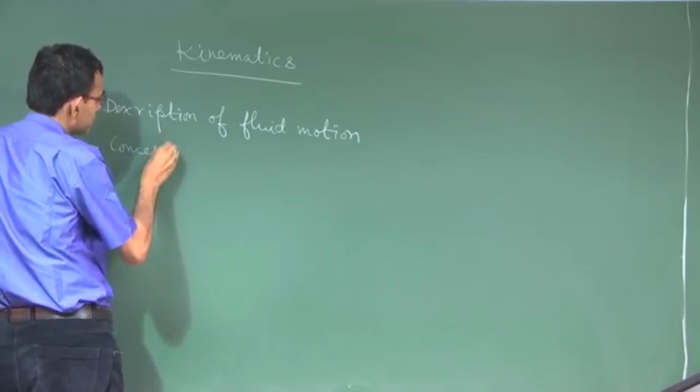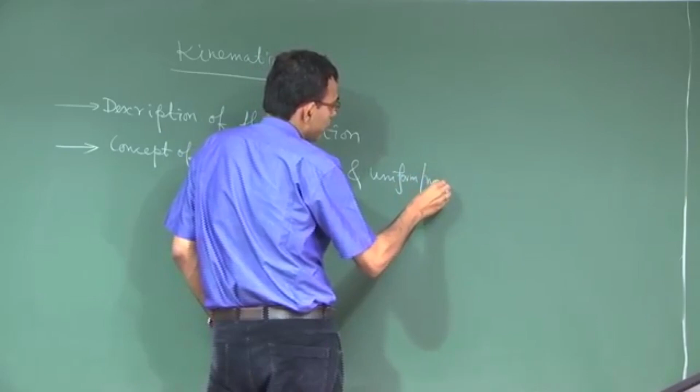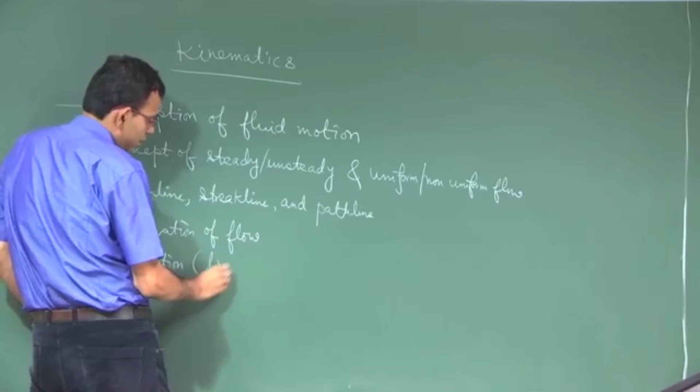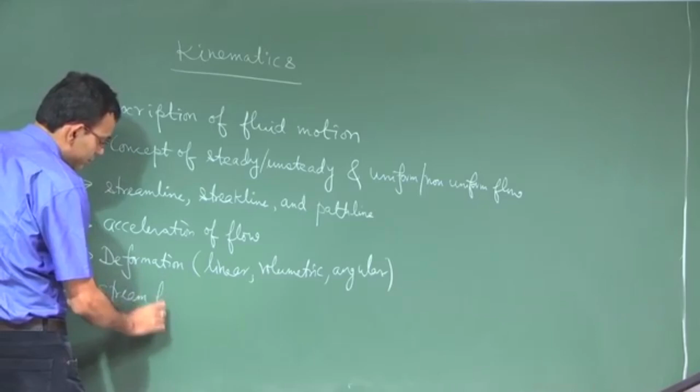So what we are going to teach in kinematics, I will identify as pointers one after the other: description of fluid motion; then concept of steady, unsteady, or uniform, non-uniform flow; streamline, streak line and path line; then acceleration of flow; and then deformation - linear, volumetric, angular. Finally, we will discuss two important parametric representations: stream function and velocity potential. And we will bring a perspective of kinematics to all this.

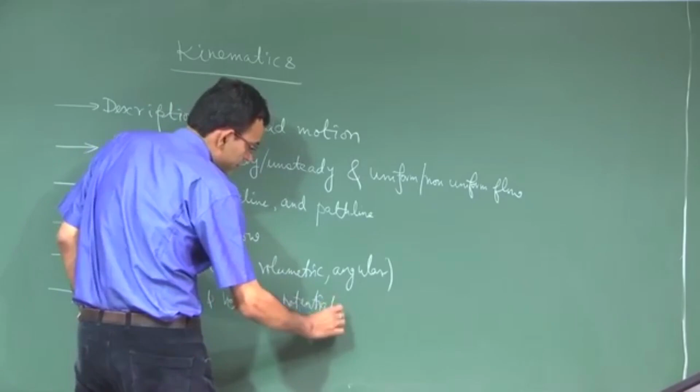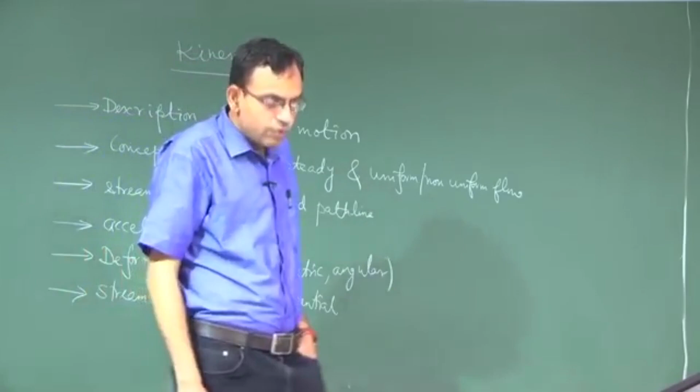Why is it required? Description of fluid motion is required because fluid, unlike solid, is not very simple to describe. The reason is that when fluid is under motion, it is continuously deforming. For a solid, if you identify a particle, it may be quite trivial to track it. For a fluid, it may not be that trivial, because the fluid presents a continuously deformable medium.

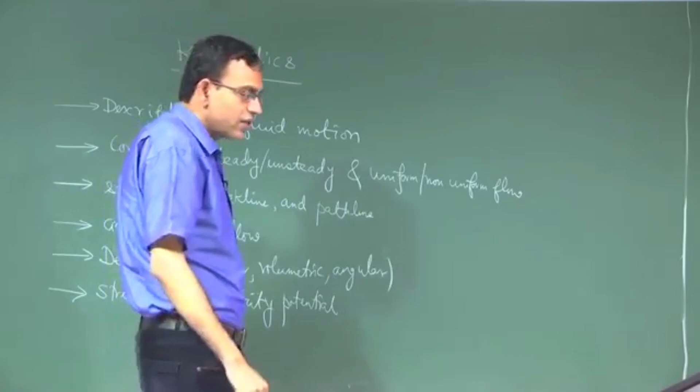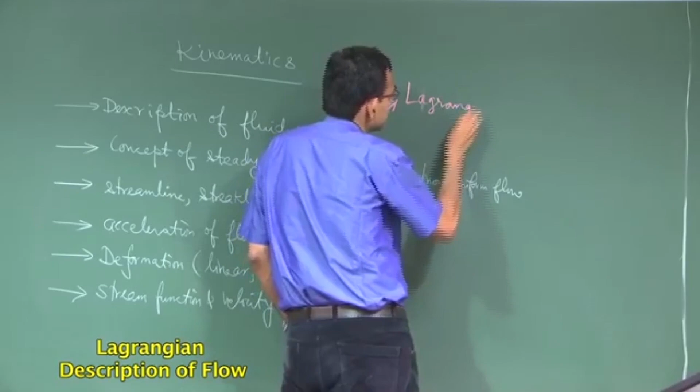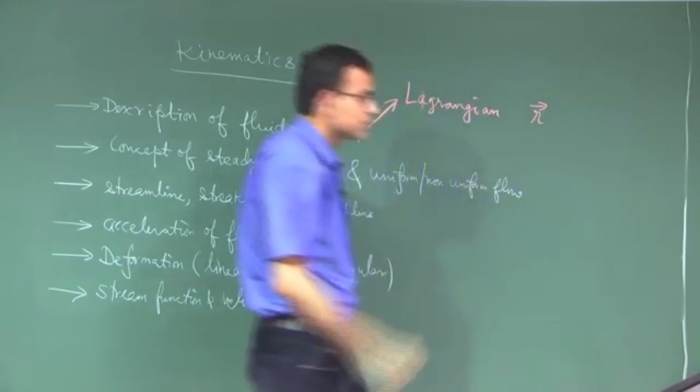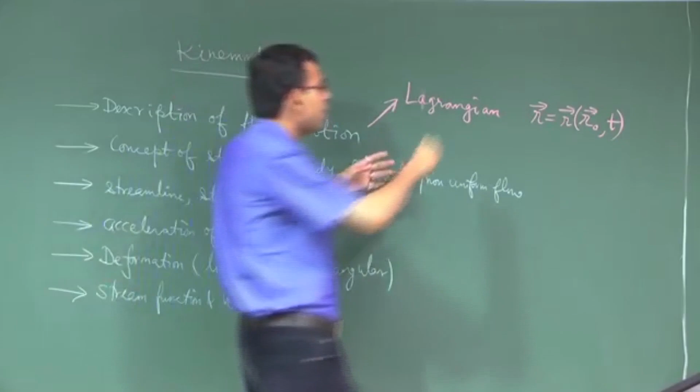So if you could track individual particles, the description of fluid motion could have been the Lagrangian description. What is the Lagrangian description? This description originates from the name of the famous mathematician Lagrange, who contributed towards the basic mathematical foundations of this subject. In the Lagrangian description, the position vector r of a particle is a function of the initial position vector and the time t. So you are tracking the particle - it is now here, then here, then here. If you make a locus of the particle, that is the Lagrangian approach.

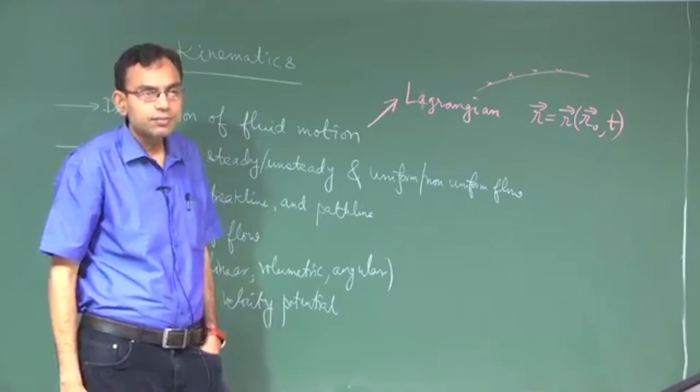It is very difficult to do for fluids, but not that people do not do it. There are certain cases when Lagrangian tracking of particles gives certain very special information, for example how good mixing is in a fluid. So it is not that the Lagrangian approach is totally discarded, but it is not a very common thing for fluid.

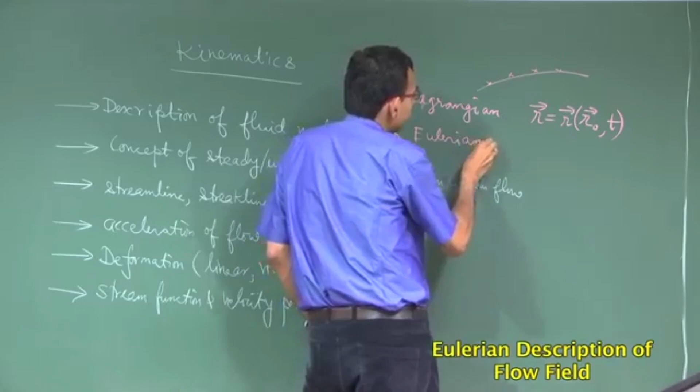So for fluids, the alternative approach commonly used is the Eulerian approach. In the Eulerian approach, instead of fixing our attention on a particle, we fix our attention to a position or location. We consider an imaginary box, a location where we focus our attention - say you are sitting with a camera, focusing here, and study what is happening across this. Some fluid is coming in and some fluid is going out.

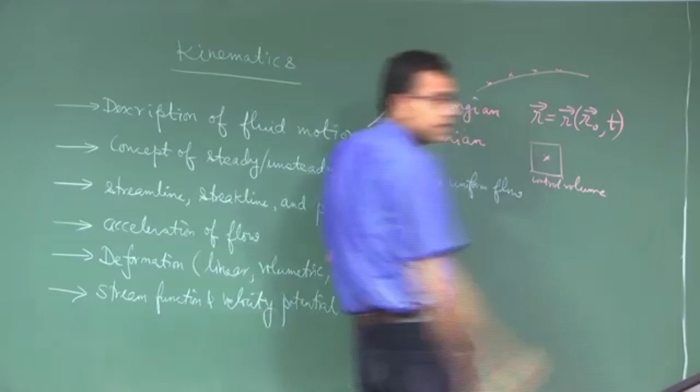This is called a control volume, and this is not a bad way to introduce the concept of control volume to students - it is a fixed region. The fixed region means specified region; that region itself may be moving. It is a specified region across which you have transport of mass, momentum, energy, everything, but the region is specified. In Lagrangian, the mass is specified - so sometimes this is also called the control mass approach, and this is called the control volume approach.

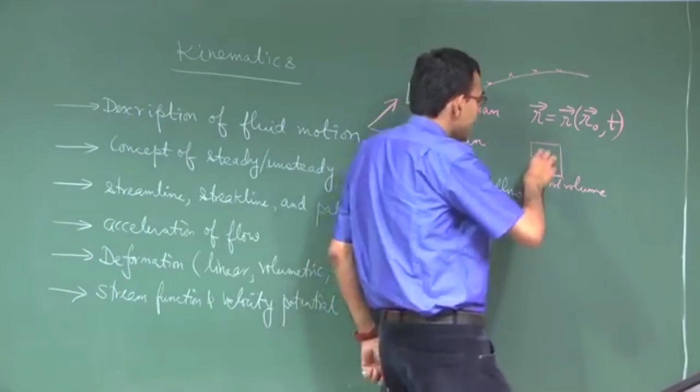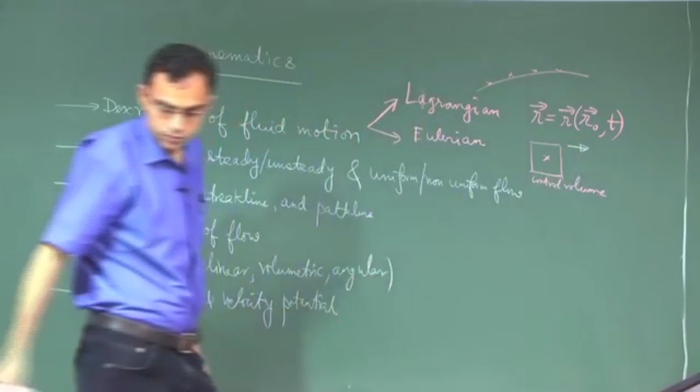So here you are not bothering about where the particle has come from and where it will go. You are simply bothered about what is happening across this, and the change that is happening is culminated in the form of a velocity vector v or u, whatever you call it, maybe capital V.

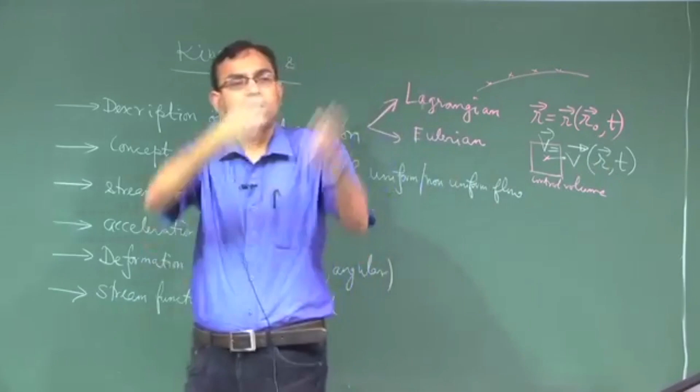So v is a function of position and time, it is not a function of r0 anymore. We do not care where the particle has come from and where it will go, we are only bothered about what is there at that location where you are focusing your camera on. So this much of information all of us provide in the class.

What most of us miss is the connection between the Lagrangian and the Eulerian approach. So where is the connectivity? The connectivity comes through this following definition:

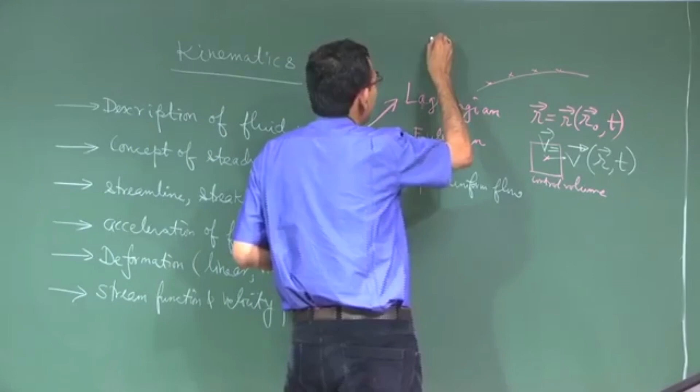Velocity of flow at a point is the velocity of a fluid particle located at that point at that instant of time. So if we want to find out what is the velocity at this point, how can we imagine what we can do? We can put an imaginary particle which has the same density as that of the fluid.

This is called a neutrally buoyant particle. When we have such a neutrally buoyant particle, then the velocity of this particle, whatever it is, the same velocity is assigned as the velocity of flow at that point. So the Lagrangian description of a particle at a point essentially gives rise to the Eulerian description, provided the density of the particle and the density of the fluid are the same.

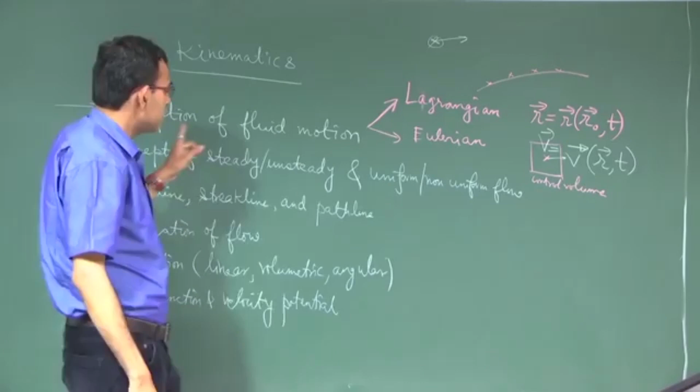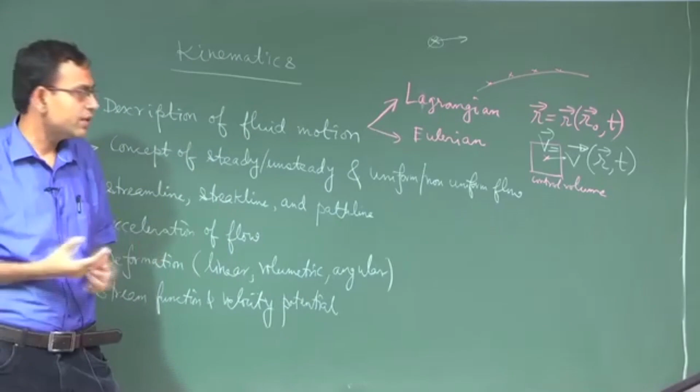Okay, so now with this bit of background, the next concept is steady, unsteady, or uniform, non-uniform flow. I will not write the definition on the board because, as I'm reiterating, this is not a regular class. My objective is to brush up whatever we already know or whatever information is already available. So steady flow means what?

So when we say steady or unsteady, we are thinking of variation with time. When you think of variation with time, you are fixing the position, because you cannot simultaneously imagine a variation with respect to time and variation with respect to position. You fix one and think about the change with respect to the other.

So steady means that at a given location, if you find there is a change in fluid property - density, viscosity, surface tension, whatever - and flow velocity, if these are not changing with time at a given point, then we say the flow is steady, and otherwise it is unsteady.

While steadiness or unsteadiness talks about variation with respect to time, uniformity or non-uniformity talks about variation with respect to position. So when we say uniform or non-uniform flow, what we are essentially talking about is whether, at a given time, the velocity and fluid properties are the same at all locations in the flow field.

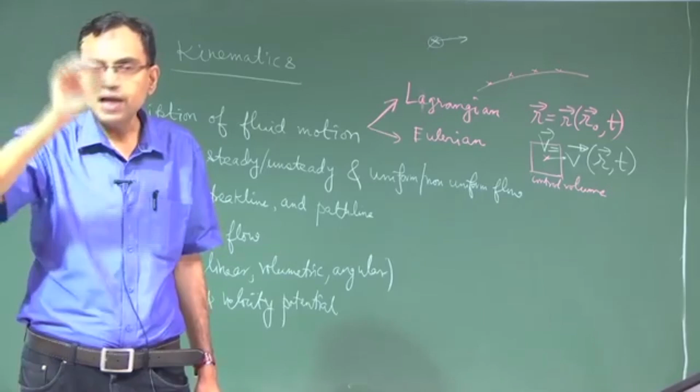This is obvious, from our practical experience we know that, say if you have a pipe, if you have a flow which is not varying with time, but still there will be a variation of velocity across the radial direction of the pipe. At the wall the velocity is 0 and at the center line it is maximum. So that means this is the most obvious manifestation of a practical situation where the flow is steady but non-uniform.

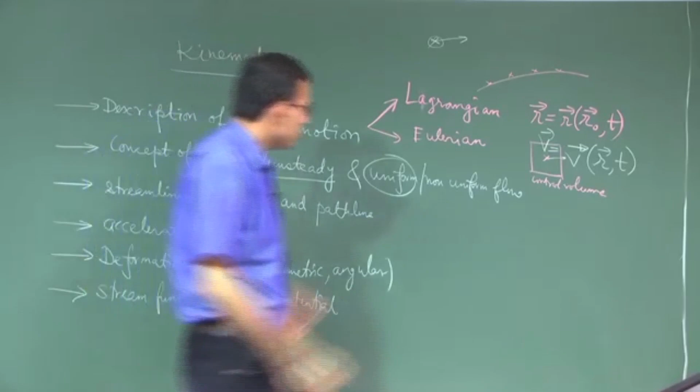But the other way around, can the flow be uniform but unsteady? This requires a little bit of brain work to answer. So then you have to understand the concept very clearly.

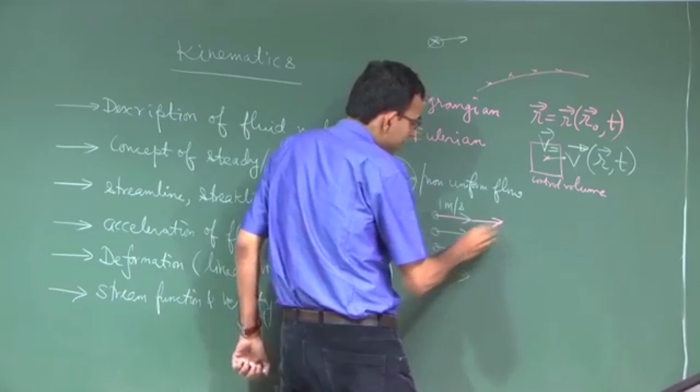So uniform means what? The velocity vectors - in terms of velocity I am not talking about properties, I am just giving velocity as an example - are the same at all the points at a given instant of time. This keyword is very important. So let us say that at all these locations the velocity along the right is 1 meter per second. Now let us say after 1 minute these become a 2 meter per second vector in the same direction or in whatever other direction it may be, that is also uniform.

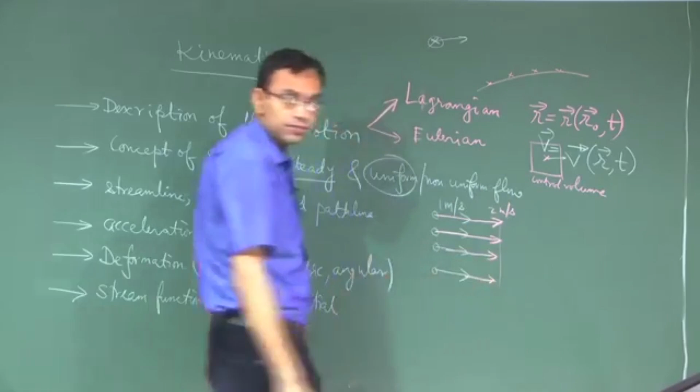So now at a given point the velocity has changed from 1 meter per second to 2 meter per second over a period of time. That means it is unsteady, but at a given time it is same everywhere, that means it is uniform. So this is an example of an unsteady but uniform velocity field.

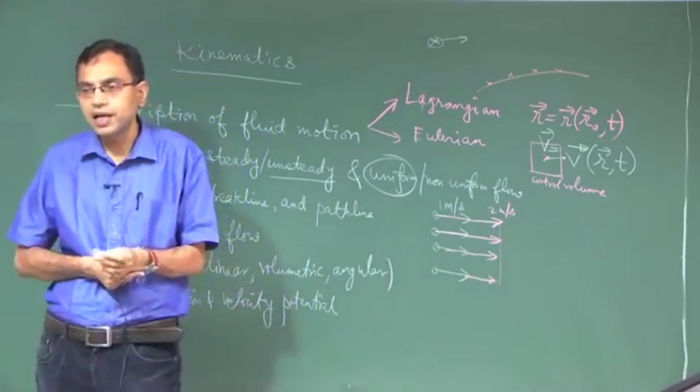The other concept about steadiness or unsteadiness, which is again commonly missed in the class, is that there is nothing called as absolute steady or absolute unsteady. It depends on the reference frame from which you are looking into the flow. So to illustrate this, normally this is the example that I give in the class.

So if you have, let us say there is a river and there is a boat which is moving on the river with a fixed velocity with respect to the river water. There is a bridge, so imagine that there is a bridge like this and the river below it. So somebody who is standing on the bridge is observing the flow of the river water.

So first the water below the bridge is at a standstill, then the boat comes, creates a disturbance in the water, and then the boat goes away, the disturbance again dies down. So to the observer who is standing on the bridge, the water flow will appear to be unsteady, because at a given location below the bridge the water velocity is changing with time.

Again the same river water, the person who is sitting on the boat is moving with the boat itself, and with respect to the boat the river water velocity is not changing with time. So to that person the same river water is appearing to be steady.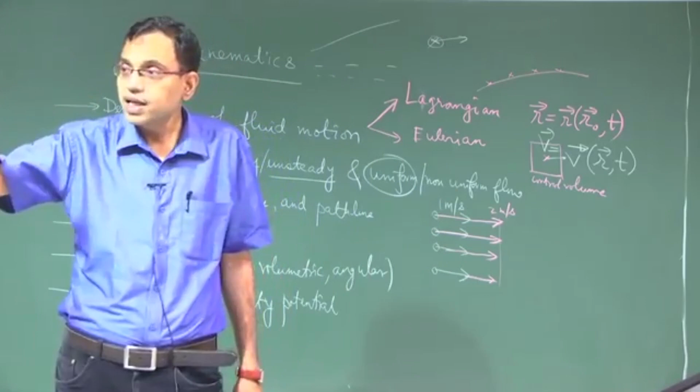So the same river water flow to an observer who is in a fixed reference frame, the bridge acting like a fixed reference frame, is appearing to be unsteady, whereas to an observer who is moving with a reference frame, not an accelerating reference frame, but one moving with uniform velocity, the same flow appears to be steady. So this is a transformation from a stationary reference frame to a reference frame which is moving with uniform velocity, not accelerating.

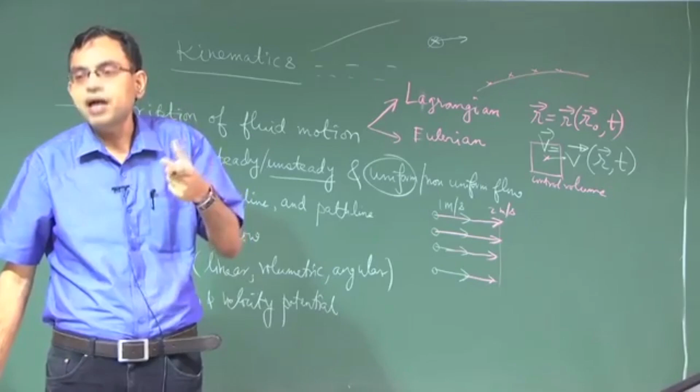This transformation is called Galilean transformation, and this Galilean transformation can convert an unsteady flow to a steady flow. So although the description of fluid motion, steadiness, unsteadiness are sort of trivial things we think in kinematics, there are finer details which I believe are important to be discussed in the class, in addition to the basic definitions of these concepts. These are the additional things.

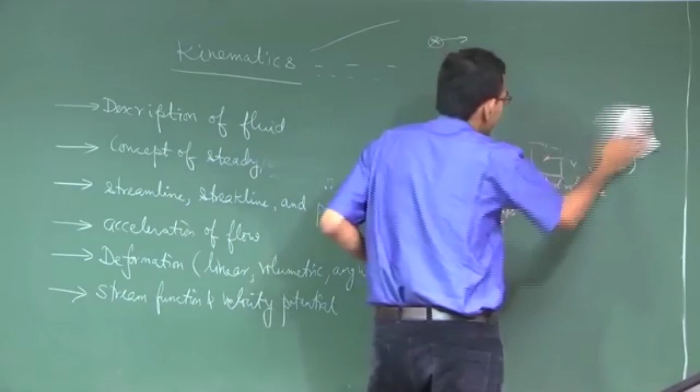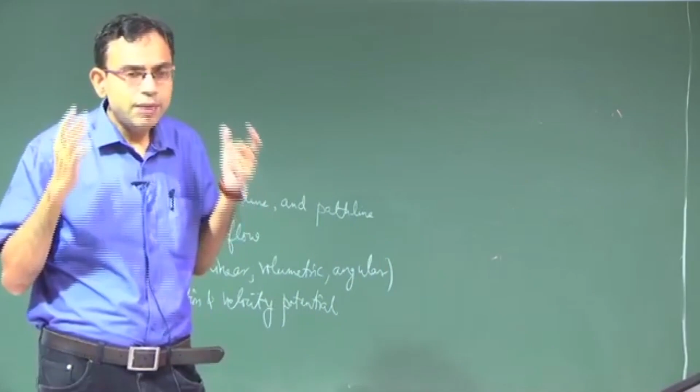So we have figured out how you describe the flow velocity, and essentially the velocity can be a function of position and time. Now the question is that if you are doing an experiment, flow velocity measurement is one particular attribute, but the remaining issue that remains to be addressed is how do you just qualitatively visualize the flow.

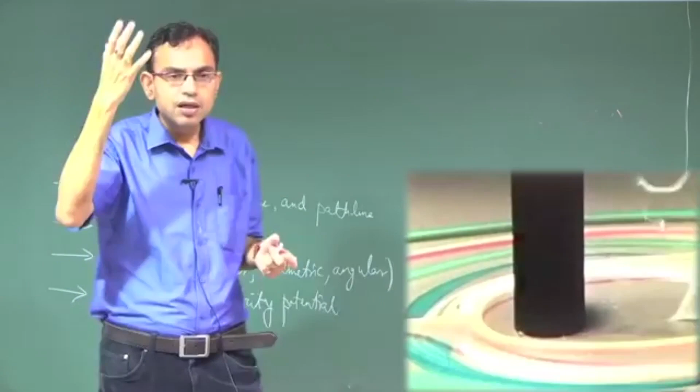For example, if you have a power plant, you see that smoke is emitting out of the chimney, that can give you the nice vortex structure which is there at the top of the chimney. So smoke emission can itself give a flow visualization for gases. Similarly, for any general fluid, there are some traditional ways of looking into flow visualization, and these flow visualizations are described by certain imaginary lines in the flow field, and those lines are streamline, streak line and path line.

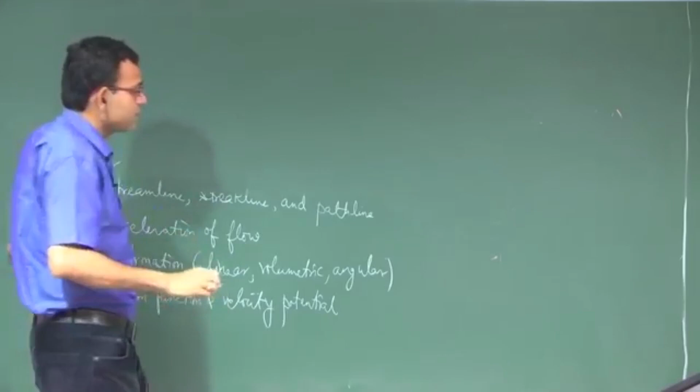So this is a big motivation before I tell that streamlines are defined as this, and that is how you can give a motivation. Why do you require to define a streamline at all? It gives a flow visualization. So this simple statement before defining what is a streamline, I believe, is important.

So what is a streamline? I am not writing it on the board because of interest of time, but I am verbally telling it in case you want to recapitulate. Streamlines are imaginary lines in the flow field such that the tangent to those lines at a given point at a given instant of time represents the velocity vector at that point at that instant of time. Location and time both are important, because we have seen that in the Eulerian description both location and time factors come into picture.

So again this is a gap in giving the definition. In most classes teachers will say streamlines are such lines that the tangent to the streamline at a point defines the velocity vector, without talking about a given instant of time.

So now if you have a streamline like this, you have 2 points which are sufficiently close on the streamline. Let us join this by a position vector dr.

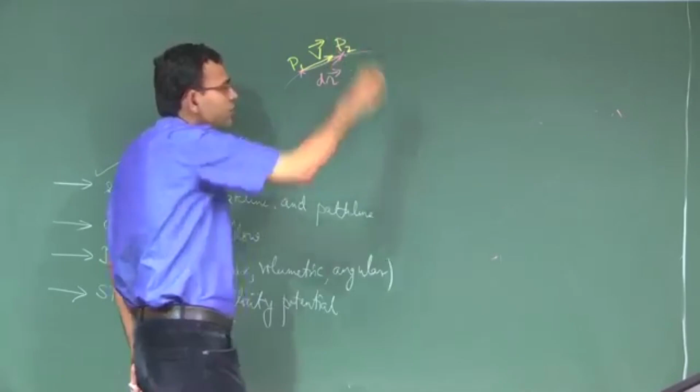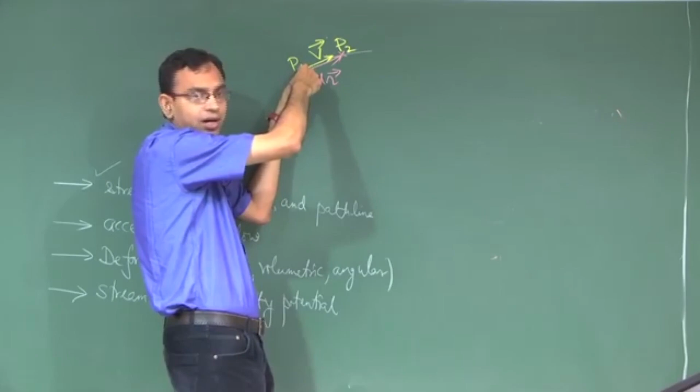Also consider the velocity vector v. These points P1 and P2 may be anywhere on the streamline, but let us fix up P1 and bring P2 very close to P1. When we bring P2 very close to P1, what does P1P2 become?

It becomes a tangent. That is the definition of a tangent to the curve, a limiting case of a chord when the points connecting the chord come very close to each other. So when it becomes that, I have written dr, meaning P1 and P2 are differentially close. Just for clarity in the picture I have drawn it like this, but actually when they are very close to each other, this is a tangent. By definition, the velocity is also a tangent to the streamline, so actually they should be coincident lines.

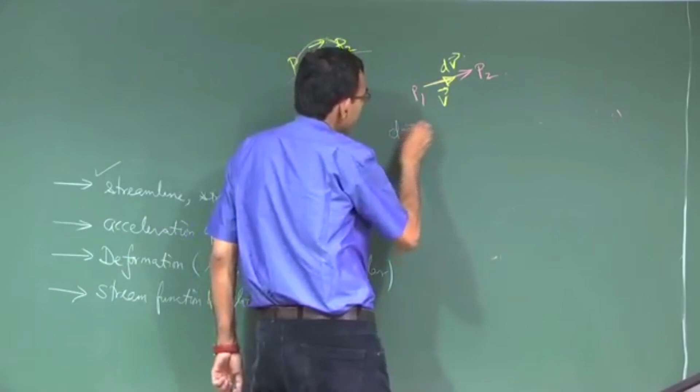So the correct diagram will be: you have P1, P2, and you have the velocity vector, dr and v. If they are along the same direction, you have dr cross v equal to a null vector, because the angle between the two vectors is 0.

So we can write this cross product in determinant form. This means that, if you have a vector which is a null vector, all the components are individually 0, where i, j, k are unit vectors along x, y, z. It is needless to mention this at an advanced level, but for completeness I mention it. So this component is 0, this is 0, and this is 0, and combining these gives dx/u equals dy/v equals dz/w.

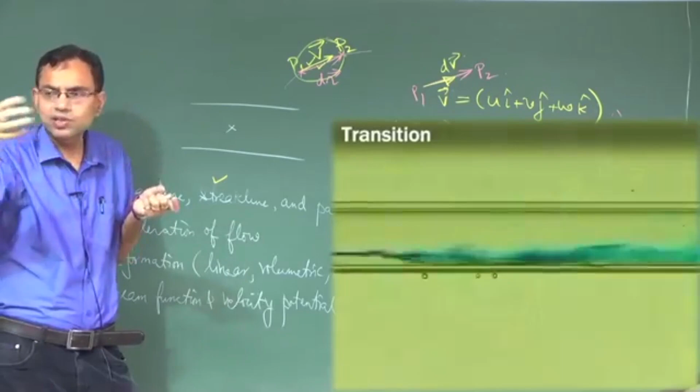So streamline is done. Streak line is a very interesting thing. What is it? It is the locus of all particles which, at some earlier instant of time, different instants of time, passed through a common point. To give an example: there is a pipe and you inject a colored dye at a point using an injection syringe, say a blue dye called thymol blue, which looks like ink.

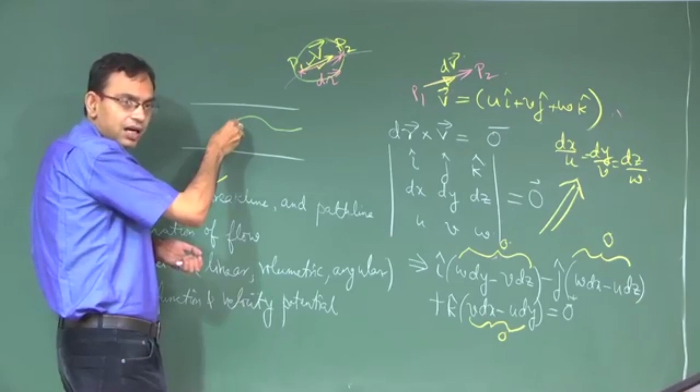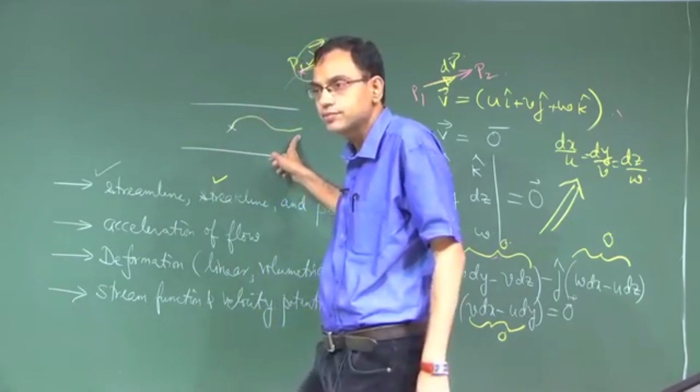After some time you will see a colored line in the flow field. How does this colored line evolve? Whatever particles passed through this point earlier got colored by the dye, and wherever they are now, if they are joined, they give this colored appearance. So it is the locus of all particles which, at different earlier instants of time, passed through a common point. This is not a streamline, and it is the line we actually visualize in the flow. There is normally a misconception that in experiments what we visualize is a streamline — we fundamentally visualize this streak line, not the streamline, but sometimes it becomes identical to the streamline, and we will see later when that happens.

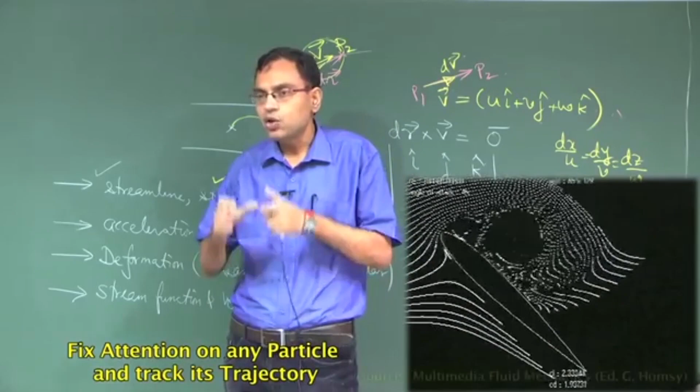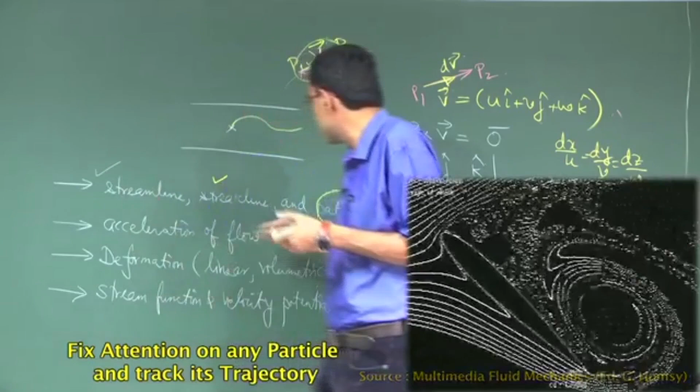Finally, path line. What is a path line? It is the locus of an identified fluid particle, essentially a Lagrangian description, nothing more than that — just the locus of an identified particle.

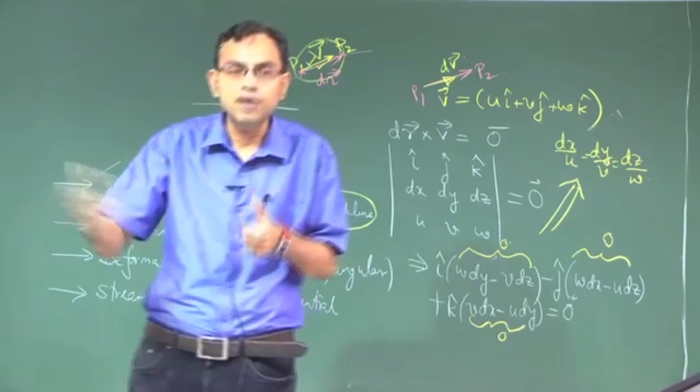When we define streamline, streak line and path line like this, the concept does not become clear unless we work out a clear illustrative problem distinguishing these three lines. So in the next lecture my agenda will be two things: first, to complete this conceptual discussion of streamline, streak line and path line through a simple illustrative problem elaborating the difference between them, and then, going one step from velocity, to describe the acceleration of flow. That will be the agenda in the next lecture.